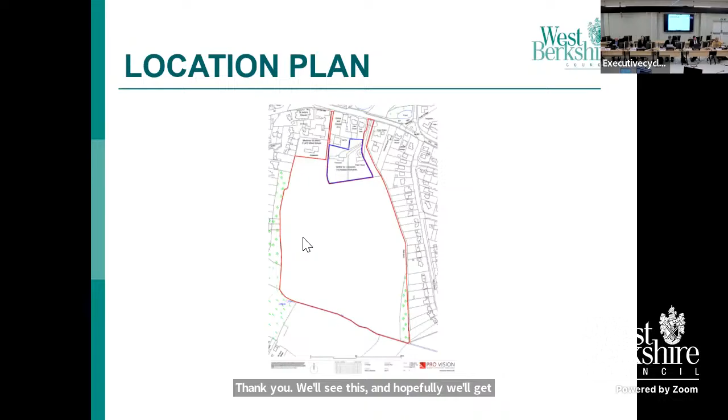This retaining structure will be 192 metres in length and will be curved. For those who attended the site visit, this is the application site area shown in red. The area we're talking about is here. For those who went on the site visit, we were standing on the roadway about here, and then some of us moved down lower to the site to see the retaining structure.

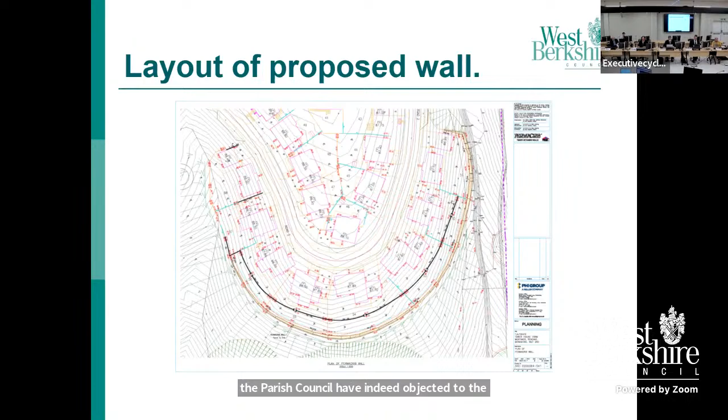Just to refresh your memories, the reason for committee determination is that the ward member has called the application to committee should the parish council object to the application, and the parish council have indeed objected. Hence we are considering it at planning committee tonight. The recommendation, incidentally, is to approve the application.

Moving back to the retaining structure itself, as I mentioned, it will be 192 metres in length. It will vary in height between 2 and 5 metres across the horizontal line, and it will be topped out by a 1.2 metre high vertical timber boarded fence, located to the rear of the gardens here, with these being the proposed dwellings.

In the agenda sheet on page 22, you'll see the planning history. For those who may not be aware, to the west of this portion of the site, officers are currently considering an application for phase 3 of the reserved matters for 52 dwellings. I mention that because it was talked about at the site visit.

In terms of consultations, the parish council are pleased with some aspects of the development, but they are objecting to the retaining structure. There are no other objections at all from any statutory consultees. The council has received one letter of objection from a local resident on the grounds of visual impact.

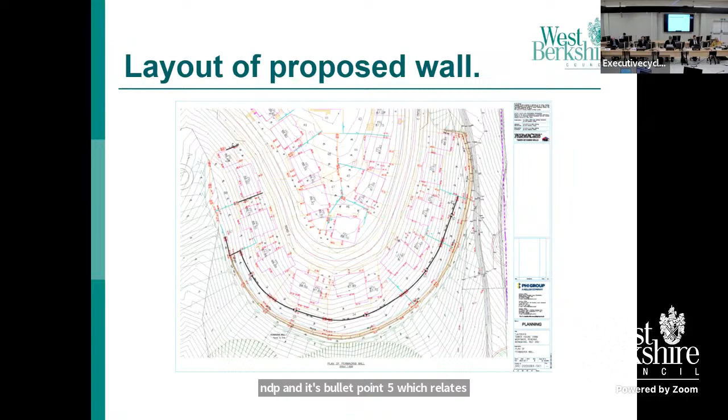In terms of planning policy, there are the normal policies in the core strategy, but I particularly draw your attention to policy SDB1 of the Stratfield Mortimer Neighbourhood Development Plan. This site was allocated under that NDP, and bullet point 5 relates specifically to a smooth visual transition between this development and the public open space, which will be to the south of the application site.

In terms of the principle of development, clearly the development is already approved under the original outline permission.

In terms of character and appearance, this I would say is the main issue for members to consider. On the screen there is a typical cross-section of the retaining wall as proposed. This is clearly the retaining structure, timber and crib wall, up to 5 meters high in places, not quite on the vertical plane, but almost vertical.

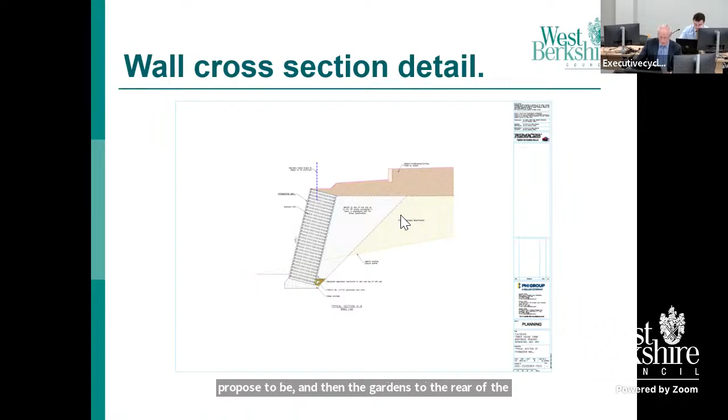This is where the fencing is going to be proposed. The gardens to the rear of the dwellings will be terraced in order to achieve the necessary levels, perhaps better shown on the lower section here. These are the dwellings, this is the roadway, the dwellings, the terrace gardens, and then the retaining wall leading down to the public open space and beyond.

So the principal issue in the officer's view is whether there is indeed a visual impact that is unacceptable, or indeed acceptable, in relation to this new retaining structure.

As I noted, the rear gardens of the plots behind the proposed retaining wall are now to be terraced. It is proposed that if committee should choose to approve the application tonight, there will be conditions to landscape the retaining structure and to ensure that the appropriate fencing materials are used.

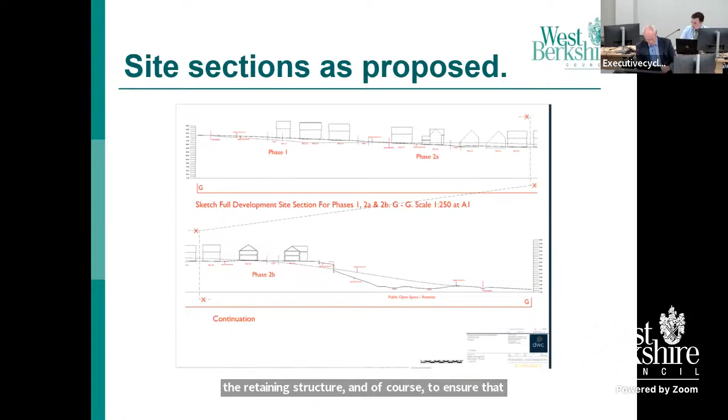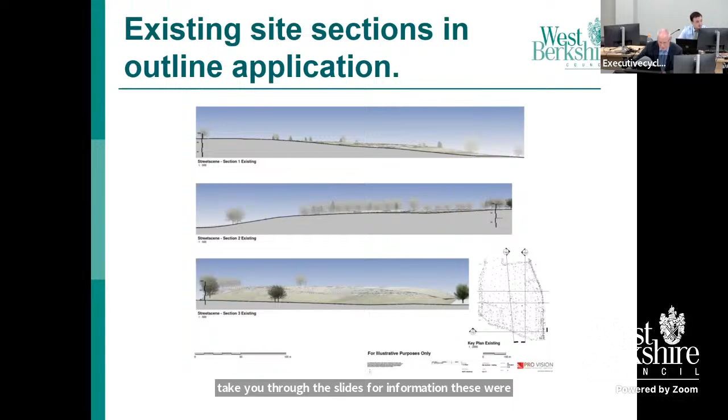Before I go on to the planning balance and conclusion, I'll just take you through the slides for information. These were the original cross sections proposed at the outline stage, which were illustrative only.

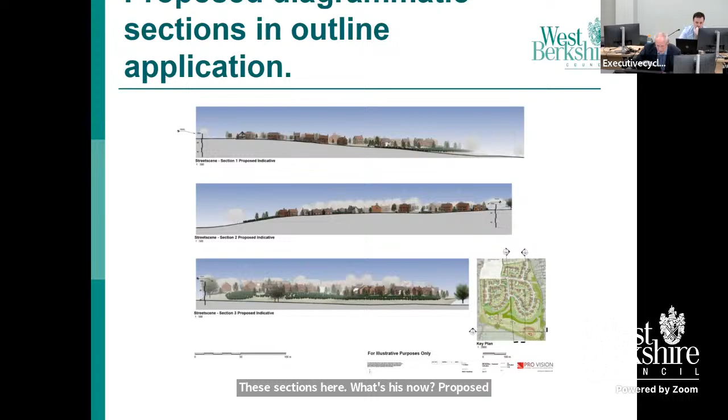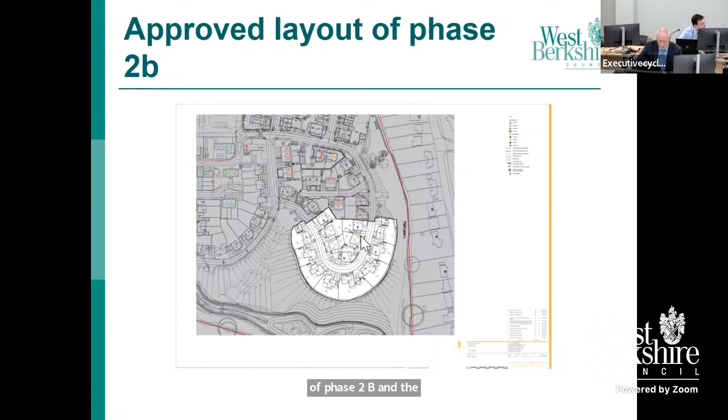These sections here are what is now proposed, as was proposed in the indicative outline. This is the area of phase 2B, and the perimeter wall is to the south of the white outlined area here. This, for information, is phase 3 to the west.

There was a query at the site visit about how the public open space in this area was to be accessed by these properties. It will indeed be through this access here and this footway. So there will be no footway access, for obvious reasons, from the retaining structure.

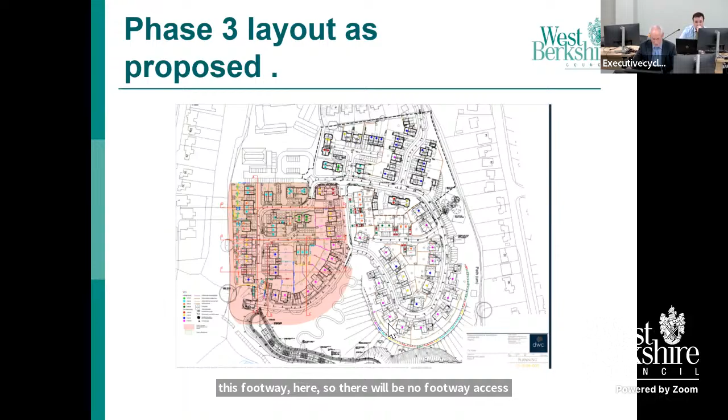This, purely for information, I stress is not for consideration at committee tonight, but it was following a question from the committee site visit: would there be any retaining structures in phase 3? Yes, they are proposed, but much smaller in extent, and officers are currently considering that application under delegated authority.

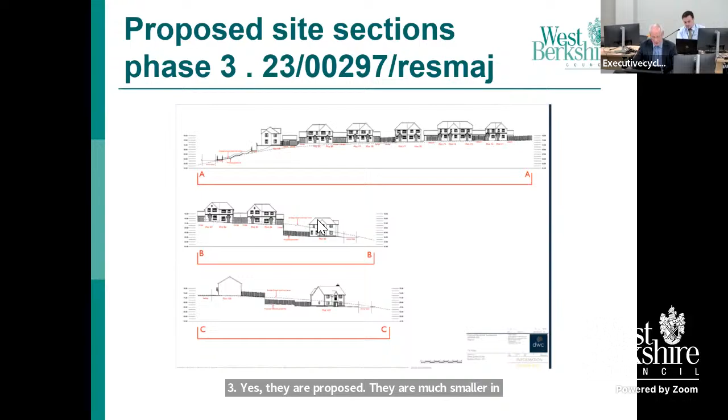Finally, for those of you who didn't make it, to the south of the application site there are open fields and a public footpath. I walked the footpath and took photographs looking north, i.e. from the south, just to let members know what sort of visual impact the retaining structure may have.

In my professional opinion, in advising the committee, the retaining structure will have a degree of visual impact, but in fact the existing houses already have a more significant visual impact than the retaining wall will, by definition of the levels involved.

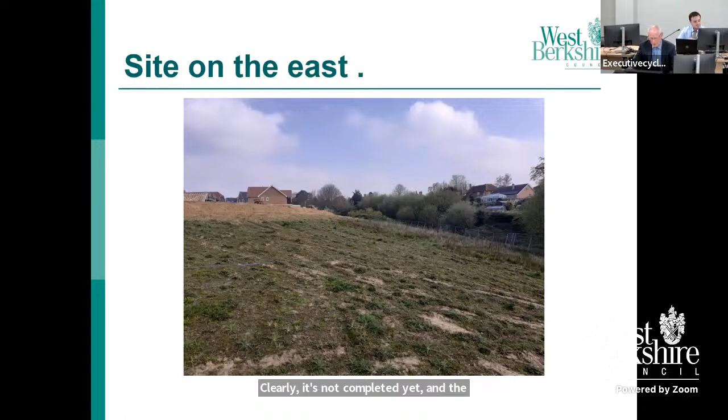This is simply a photograph from the site from the east. Clearly it's not completed yet, and the houses as existing are to the right of the screen, i.e. to the east. This is looking northwest. This is looking north-northwest again, and you can already see the nature of the levels that will be involved on the site.

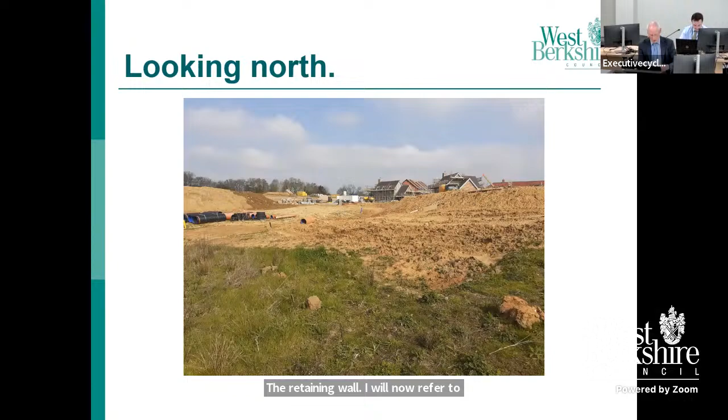So finally, before I come to the planning balance and conclusion, Mr. Chairman, there was a query about future maintenance of the retaining wall. I will now refer to the update sheet on the future ongoing maintenance and management of that proposed retaining wall.

Having taken further legal advice following the site visits, we consider the retaining wall is indeed site-specific infrastructure. It will require maintenance for a minimum of 60 years, on which it is guaranteed. There's an annual inspection fee of £250. Therefore, we are seeking an index-linked sum of £15,000 to be granted to the council through a deed of variation to the existing Section 106, which relates to the extant planning obligation, which will still flow through the original outline permission.

Just for absolute clarity, in the existing Section 106, because this follows questions from the site visits, there will be a transfer of ownership from the developer to the council as public open space in due course. We are already receiving a significant commuted sum for that, but as this retaining wall will form part of that future public open space, the additional £15,000 will be added to that commuted sum.

In terms of site levels, this was obviously raised at committee. In phase 2B, there was no specific levels condition. We are now proposing a specific levels condition, should this reserved matters approval be granted, so that the planning authority can retain control of those levels in the future.

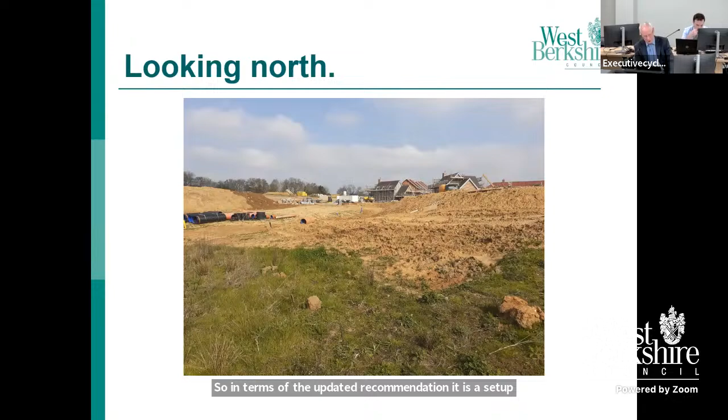I've mentioned the access through the footpath from phase 3 into the public open space. In terms of the updated recommendation, it is as set out in the agenda committee report, including the section 106.

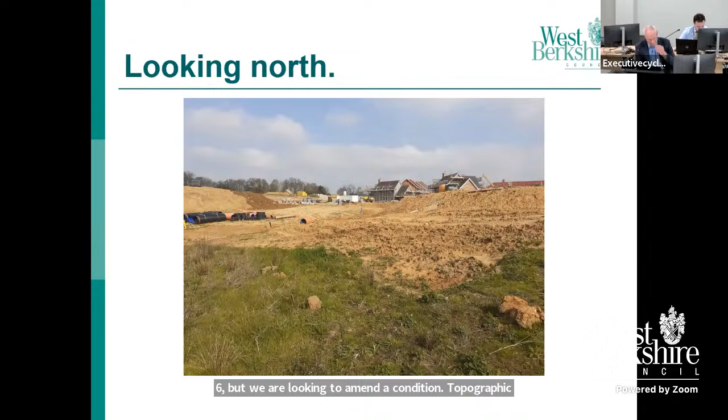We are looking to amend a condition on topographic details as set out on the update sheet. And finally, thanks to Councillor Macro, who noticed a typo which we didn't. On condition 6 on the main agenda, the word 'until' should be inserted on the first line of that condition, and we will do that should the application be approved.

Thank you, Chairman. I'm happy to answer any questions.

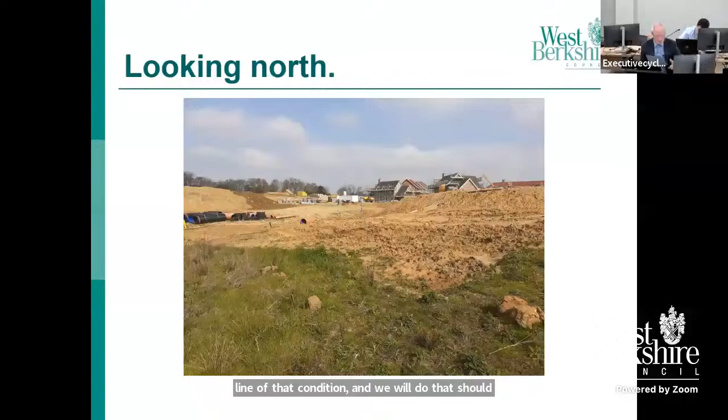I am not clear on one or two of the shots that were presented. I'm confused, and it would help me greatly if I could ask a question of Mr. Butler now. I'm happy for that to happen. Yes, thank you Chairman, thank you.

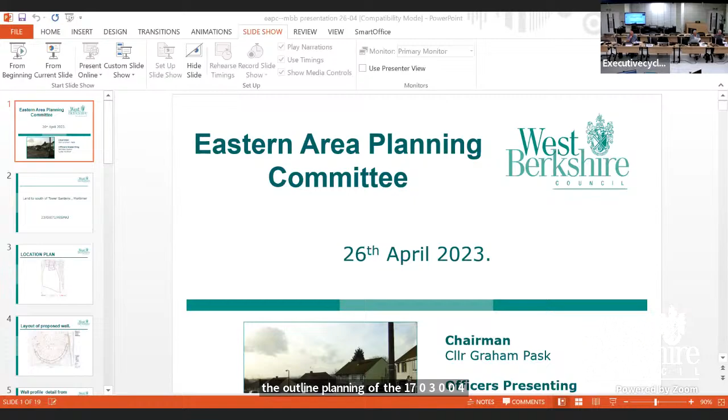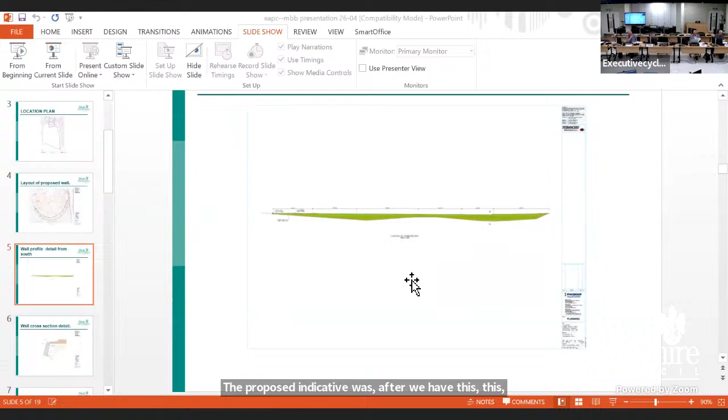It's these comparison plans that you showed several slides back. You said here's the scene as existing, and here's the proposed indicative. But on our papers, that proposed indicative relates to the outline planning of 17-03-004. I think you implied the proposed indicative was after we have this new structure, but I could not see this new structure on these proposed indicative plans. Could you clarify what these are?

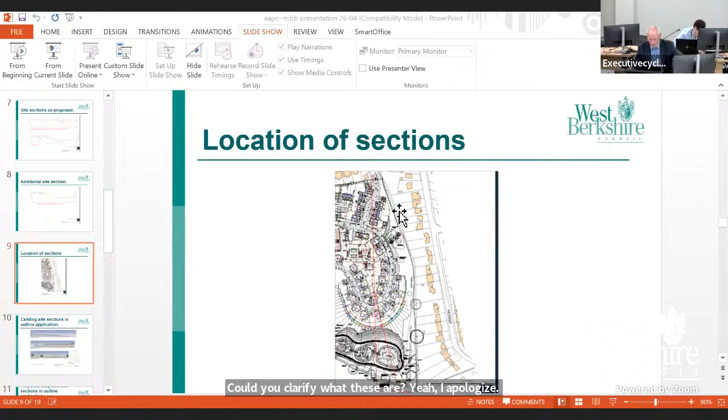Yeah, I apologise, it wasn't clear. You're right, actually, Councillor. It's proposed indicative under the outline, not the new one. Thank you, that's right. It actually does say that in the heading, but I didn't make it clear, so I apologise for that. Apology fully accepted, no problem at all.

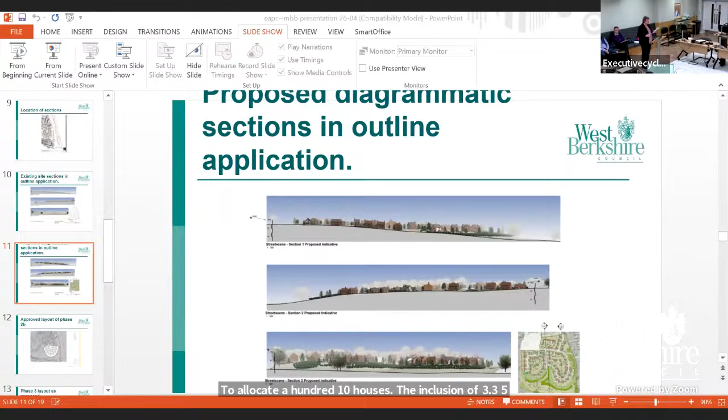This is an NDP site. Stratfield Mortimer undertook an NDP to allocate 110 houses. The inclusion of 3.35 hectares of public open space in the proposal by TA Fisher undoubtedly contributed to the choice by the village of this allocation. By the first planning application, the open space had shrunk 10% to 3 hectares.

In February 2019, the outline permission showed the houses being built gradually lower as you move from north to south, and the main part of the open space sloping down further to the south of all the houses. The design included SUDS, for which the pond was in the open space. The open space is described in the design and access statement as accessible and with a leisure trail.

NDP members at the time had discussions with TA Fisher regarding the design of the open space, including planting to make it a wildlife haven while still accessible to the public. I met with the head of countryside at the time about future management. We discussed WBC adopting it for a year to complete snagging and the possibility of SMPC adopting it after that, with section 106 money passing with it. Some maintenance could be done by volunteers and incorporate SMPC organised events like haymaking on the slopes.

Application 20/01697 gave the details for drainage and water. The SUDS system was now designed differently, but all the levels shown still indicated smooth contours down the site. I believe that at this point there was a failure to predict the significant difference in levels that would now arise down the site.

21/02347 was the detailed design for phase 2B. This is the first time there's an indication of an abrupt change in level at the boundary, but because that boundary was between 2B and the open space, it wasn't looked at by anybody and it wasn't shown as a wall.

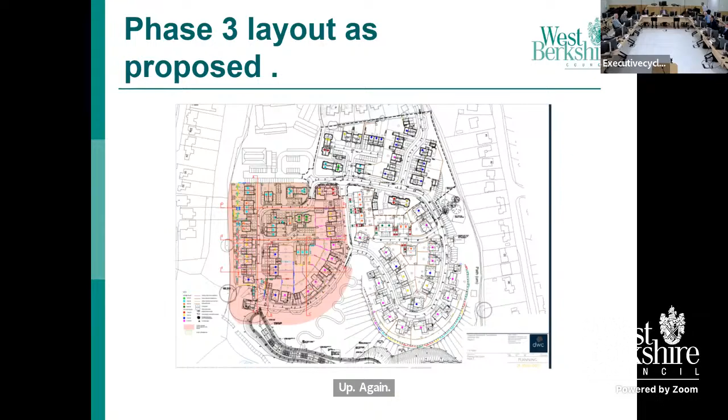Perhaps if you get the plan up again, thank you. The distance between that, I'm going to call it road base, if it is a road base, correct me if I'm wrong, and the edge of the site where this wall is proposed, isn't that far. So there'd be huge terracing in order to lower any houses, in my opinion. Does what I'm saying make sense?

Could you please explain how we could possibly alter the level of it now, bearing in mind what has been approved and what has been indicated on the plan, what has been approved under that 2B 01422. Lydia, can you help, please?

I'll try, Chairman. So the drawing which is on the screen now, we are proposing condition 3 for topographical details of the levels for those specific plots, 51 to 57, I believe, to the south. So that is the levels condition we're looking to apply, and the extent of it.

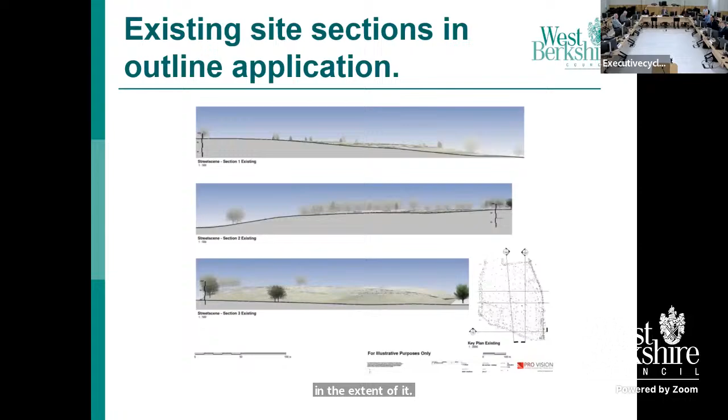Could you bring up the section drawing across with the two? Yeah, and I think there's another drawing, right, that one, that has two plans, look, that one. My glasses, I'm afraid I can't read from the screen, but that drawing should show the existing and proposed levels. So where they're proposing the levels to be, we consider that a condition is justified for those matters.

So they relate from where the road is. I appreciate that the base has been constructed, as you say. So we're looking specifically at plots 51 to 57, between that internal road and the retaining wall down to the ponds. That's the area we're seeking to apply the condition. Does that help? Well, it does help.

What we have got there, you're only looking south of that horseshoe-shaped road, are we not, on this application? In other words, those plots, 51 to 57, to the south of that horseshoe road. In which case, any deviation in height variation from what is being proposed would be, let's say, dramatic in terms of where those houses are put, and arguably could even render those houses impossible to be built. Is that a reasonable summary?

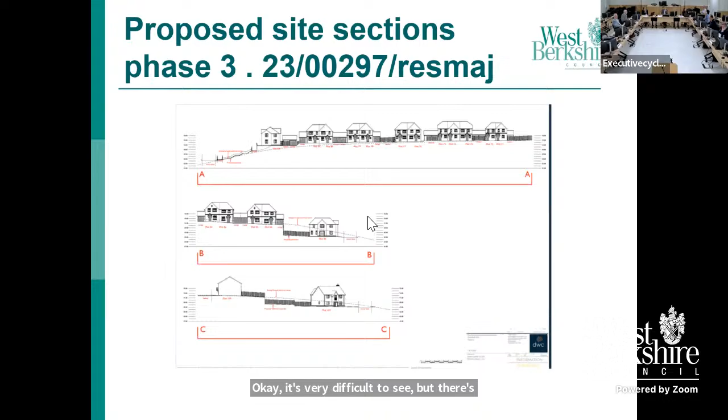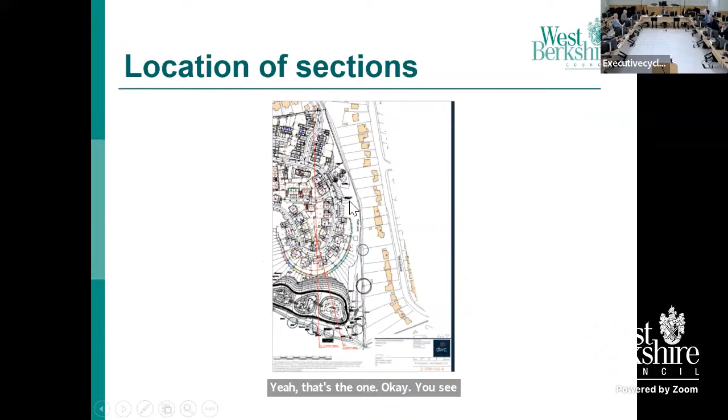That's not the one. Yeah, that's the one, okay, you see that, it's the second one, there's one with the two. Go on to the next, that one. Okay, so it's the bottom diagram, and you see phase 2B there. There's actually wording on the top. You just look at that house that's sitting on the cliff edge almost. If you look at that house, it actually says, there's an arrow point, and it says approved ground line.

And then there's another line below it, the dotted line, which could be the one you're saying we could go to that level. I don't understand that, because you just said to me at one time there are no approved lines, there's no approved levels. Yet here is a diagram saying approved line.

Question one. Next question is almost one of principle, Mr. Chairman. If we were presented here with a 4-bedroomed house and we felt it wasn't appropriate, it was too big, and we wanted to make it 2, the officers are telling us we can't do that. We can't change what's there, we either say yes or no.

So if we go to this dotted line approach, clearly this retaining wall doesn't need to be 15 meters, or 5 meters, 15 feet in old money. It would be much less, but that's not what we're being asked to approve. We've been asked to approve a 5-meter wall. We're not being asked to say, can we adjust that to a 2-meter wall? So I'm confused we can even do this, I'm confused we're even considering this.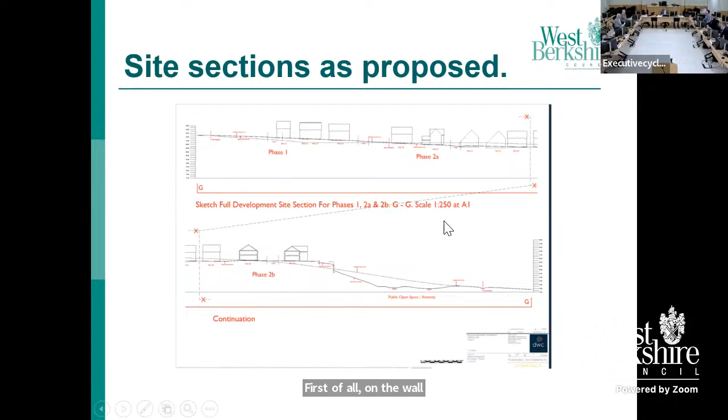Councillor Macro. Thank you, Mr. Chairman, I've got a couple of questions. First of all, on the wall layout plan, there's a black line that runs around behind the, well I think it's black, I'm colourblind, but am I right in thinking that's terracing?

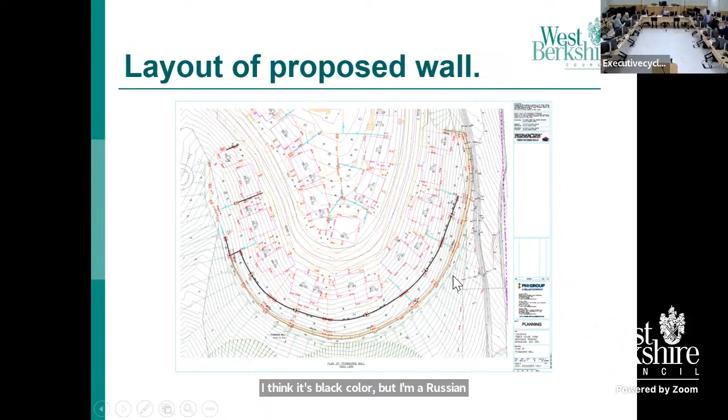Yes. Okay, the other question I have is, I'm a bit confused as to what access there is now, or would be if this goes ahead, for the public to actually access the public open space. Yeah, if I can just show you on this plan here, so if the application is approved, the access will be through this roadway here, down here, and then there's a footway here.

Okay, so it'll be a bit of a distance, I mean it's obviously not direct, but it will be a short walking distance down to this footway here.

Okay, the other alternative access, which is much longer for those on the site visit, you would need to walk up here, back up to here, and then bring down the public existing definitive right of way to here, and then back into the public open space, which is obviously highly unlikely.

Thank you. I'm going to build on that question. Forget the wall. If these houses were built on the slope, there wouldn't be access through their back gardens for it anyway, would there? Has there been a change in the public access to the public open space as you've just described?

I would have to check the plans, Chairman. To be honest, I don't know. I'd have to check, apologies, I don't know the answer. But it would be approximately where you've just indicated, because as I say, there was no intended public access through other people's back gardens. Exactly so, that was the point I was rather cheekily trying to make.

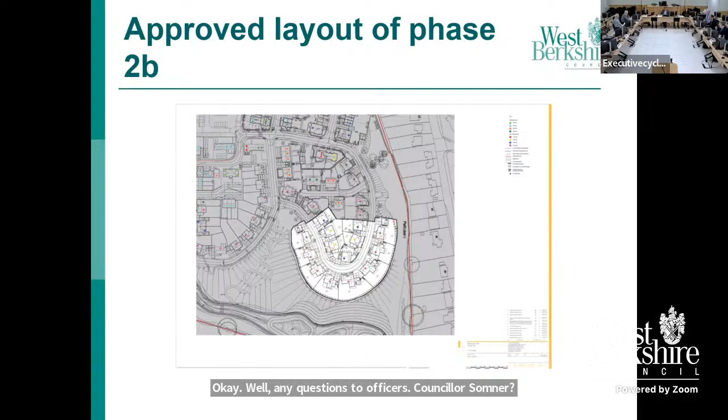Yes, okay. Right, we're still on questions to officers. Councillor Somner. Thank you, Chairman. Just clarity on the adoption of that open space, please. I thought I'd heard West Berks, and I also thought I'd heard Parish. So just clarity on that, please.

The clarity is I've checked the section 106, and it does stipulate that once the public open space is completed, there will be a transfer to the council. Nowhere in the section 106 does it say it will then be transferred to the parish council. My understanding, speaking to colleagues and officers, although I haven't had confirmation of this, although I sought it from Countryside, is that there was an implicit understanding that in time, once the council had the public open space, if the parish then wanted to adopt it and take it over.

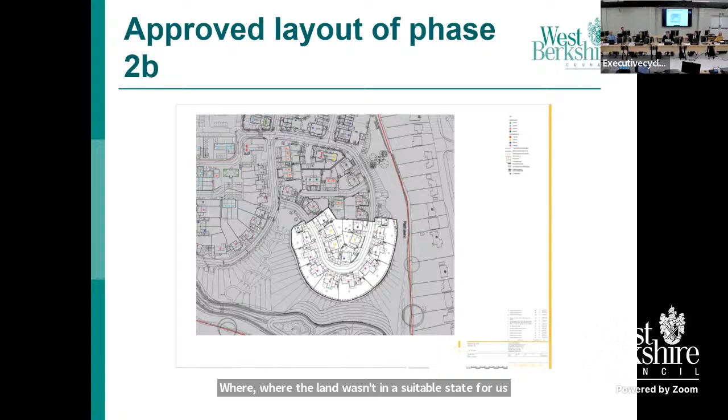We would not stand in their way, but of course they would have the commuted sums, et cetera. There was a precedent in my ward of just such a case transferring to West Berkshire, so yes, it can happen. But I've also got adverse precedents in mind, where the land wasn't in a suitable state for us to adopt it as a local authority and we chose not to. The parish therefore also walked away from it, as you would understand them to do.

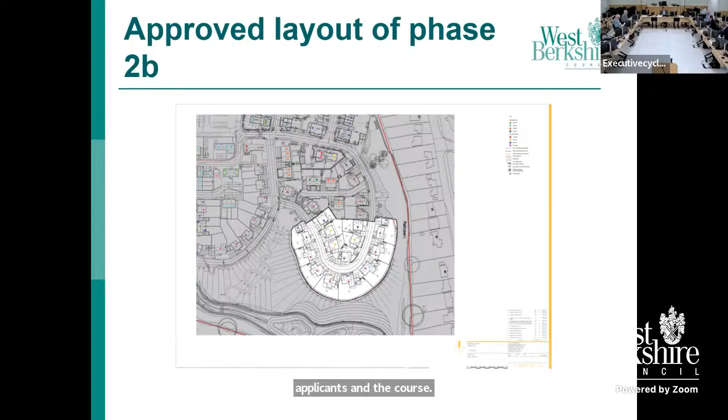Thank you. Right, still on questions to officers if you have any. It is slightly more complicated than it first appeared at first sight, isn't it? Which is why I've deliberately allowed questioning to carry on, because we have to make quite a very important decision, balancing all aspects, both for the applicant and of course those not so happy with it. So if there are no more questions, I'm looking for some brave soul to start the debate.

As I'm famed for saying, someone has to. Oh, go on, Councillor Law, then Councillor Mack. No, I'll have a go at this because for debate, I think we all recognise this is a place we shouldn't be in, but we are where we are.

This is my last planning committee meeting. I got to say, in all the years, it's probably the first one where I'm not clear what the officer is giving me to determine. I'm hearing, I've written this down. Why would I condition levels that I'm told I can do tonight if I'm not recommending a smaller retaining wall?

So my own question of the debate is, and this is what I'm not sure about, and I need guidance from officers, and if I don't get guidance from officers, I'm going to go down a certain route. Can I actually recommend a smaller wall? That's a simple question, that's a yes or a no. Can I recommend a smaller wall? A compromise wall.

Officers, can you assist? I mean, I did say we're not here to negotiate, but there are mechanisms we can employ tonight in the interest of all, if they're reasonable, such as deferrals and so on. We'll just pause a moment while they put their thinking caps on.